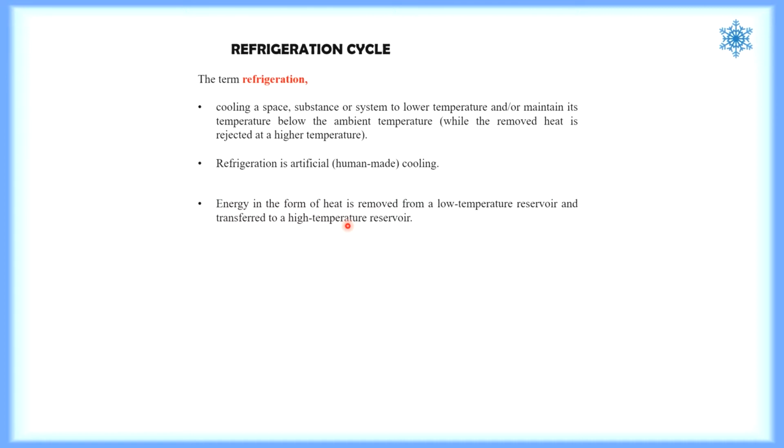Fourth point, work of energy transfer is traditionally driven by mechanical means, usually performed by a compressor, a refrigerant compressor. So refrigeration has many applications, including household refrigerators, industrial freezers, and air conditioning systems.

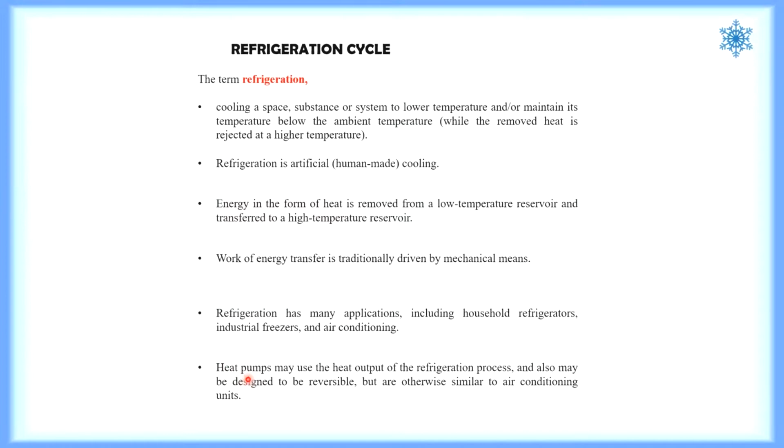Now, heat pumps may use the heat output of the refrigeration process, and may also be designed to be reversible, but are otherwise similar to air conditioning units. So we will be discussing heat pumps later on.

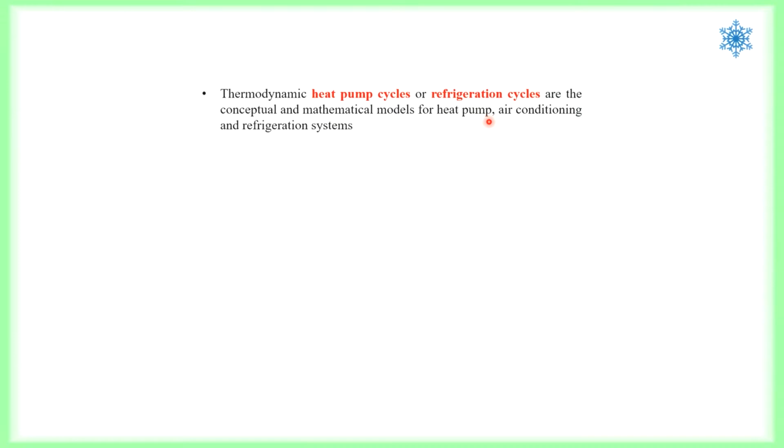Now, thermodynamic heat pump cycles or refrigeration cycles are the conceptual and mathematical models for heat pump, air conditioning, and refrigeration systems. A heat pump is a mechanical system that allows for the transmission of heat from one location, the source, at a lower temperature, to another location called the sink or heat sink, at a higher temperature. Thus, a heat pump may be thought of as a heater if the objective is to warm the surroundings, and is usually used in colder countries.

So heat is removed from a cold space or a cold place to a warm place—that is a refrigerator or cooler. A heat pump or heater is to heat up a space; a refrigerator or cooler is to cool down a space.

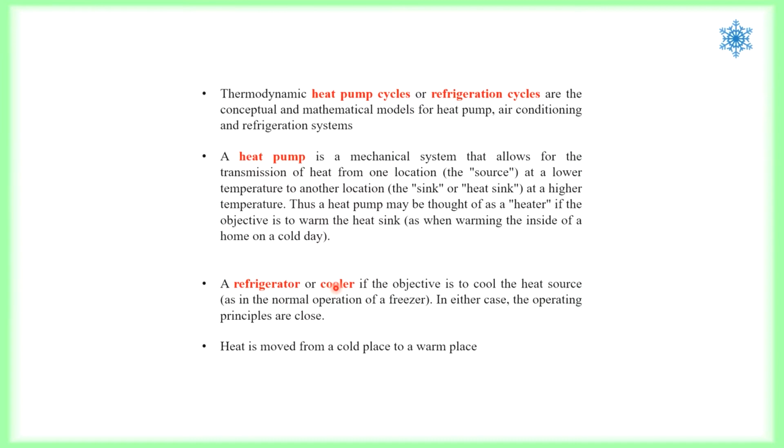So that's for the first part, the theoretical part of refrigeration. We'll continue with the principal parts of a refrigeration cycle. There are a few components within the refrigeration cycle which we have to take note of.

The principal parts are: the first one is an evaporator, which is a heat exchanger. Inside the evaporator, usually you have liquid refrigerant, or cooling agent, running inside tubes or coils. As it runs through the tubes or coils, it will tend to absorb heat from the surrounding air particles within the compartment, which are trapped or in contact with the tubes containing the refrigerant. Those are the substances which operate at lower temperature—we usually call them refrigerants.

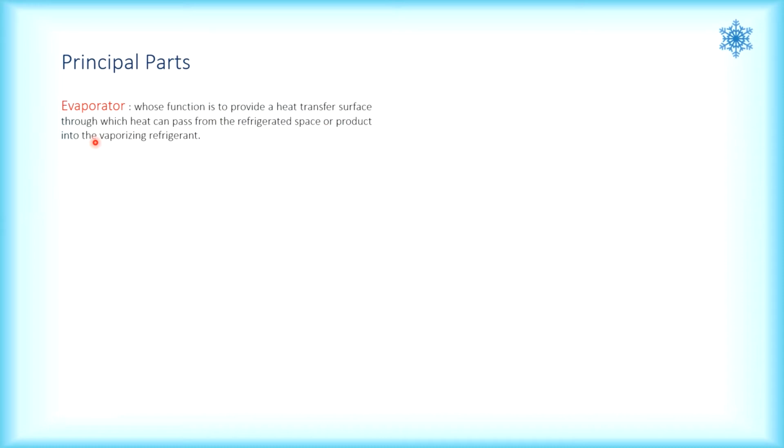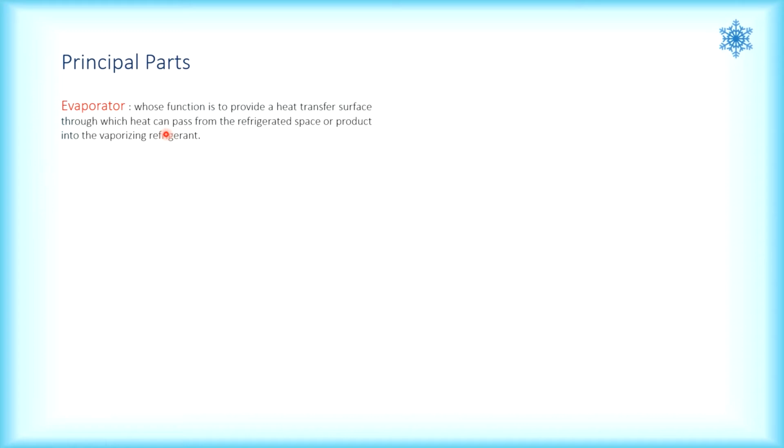Liquid refrigerant will be changing to vapor refrigerant as it absorbs heat continuously from its surroundings, through which heat can pass from the refrigerated space or product into the vaporizing refrigerant. So the refrigerant running inside the tube or coil will vaporize as it absorbs heat, because these refrigerants are very sensitive to heat energy. The moment even a slight amount of heat energy flows to it, it will start to vaporize in the evaporator, which is usually the freezing compartment of a household refrigerator.

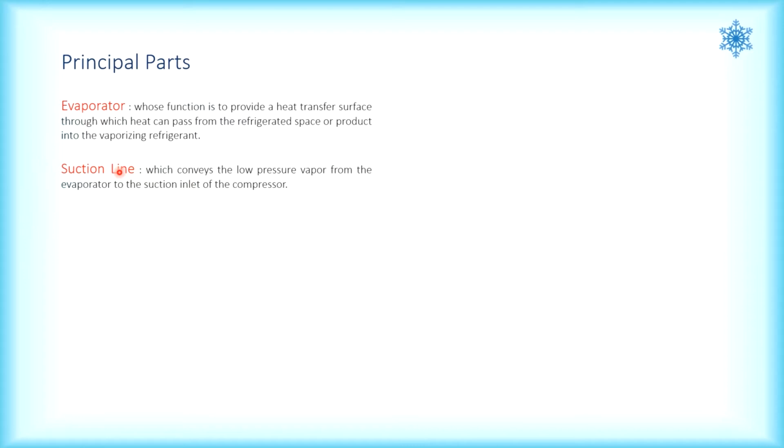Suction line, which conveys the low pressure vapor from the evaporator to the suction inlet of the compressor. So the suction line directs the vapor refrigerant to the compressor suction inlet. That is the purpose of the suction line.

Then the vapor compressor. Why do we call it a vapor compressor? Because this compressor only deals with vapor, not liquid. Compressors here cannot deal with a mixture of vapor and liquid because it will burn. So in case there is an overflow of liquid refrigerant into the compressor, it will cause the compressor to burn easily.

So it only deals with vapor refrigerant, whose function is to remove the vapor from the evaporator and then raise its temperature and pressure, to a point such that the vapor can be condensed with a normally available condensing medium. So this refrigerant, which is delivered to the compressor, will have its pressure and temperature raised, and then it will be sent to the condenser for the condensation process.

Now, the discharge line refers to the compressor. So the compressor has a suction line and a discharge line as well, which delivers the high pressure, high temperature vapor from the discharge of the compressor to the condenser.

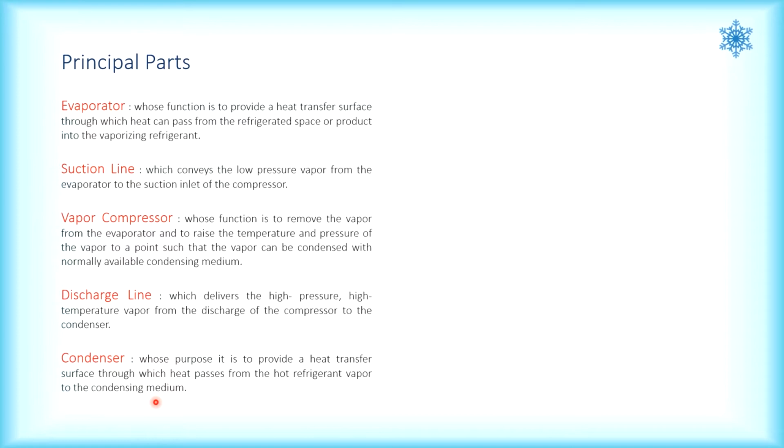The purpose is to provide a heat transfer surface, through which heat passes from the hot refrigerant vapor to the condensing medium. So if, for example, you are using a water-cooled condenser, the heat from the vapor refrigerant running inside the condensing tube will be rejected, or transferred to the water that comes into contact with the tube, by conduction and convection. So that is water cooled. You have air cooled, water cooled, and other means.

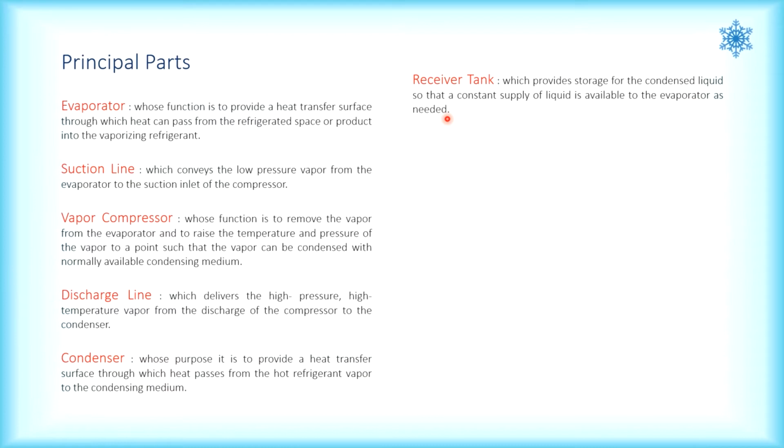Receiver tank, which provides storage for the condensed liquid, so that a constant supply of liquid is available to the evaporator as needed.

Then refrigerant flow control valves, regardless of type. The function of any refrigerant flow control is twofold, two functions. One is to meter the liquid refrigerant from the liquid line into the evaporator at a rate commensurate with the rate at which vaporization of liquid is occurring. So how much liquid refrigerant is being vaporized determines how much liquid refrigerant will be allowed to go into the evaporator. That is to meter the liquid refrigerant flowing into the evaporator.

Second point, to maintain a pressure differential between the high and low pressure sides of the system, in order to permit the refrigerant to vaporize under desired low pressure in the evaporator, while at the same time condensing at a high pressure in the condenser. So these are the two functions of a refrigerant flow control, usually what we call a thermal expansion valve, which is operated by means of temperature difference.

And then the last component is the refrigerant, that is the cooling agent. This is any body or substance that acts as a cooling agent by absorbing heat from another body or substance. To be suitable for use as a refrigerant in the vapor compression cycle, a fluid should possess certain chemical, physical, and thermodynamic properties that make it both safe and economical. These are the two most important points: it must be safe and it must be economical.

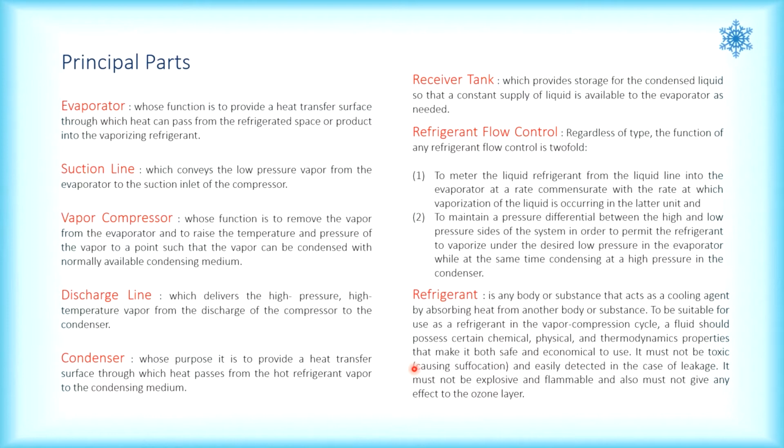Now we will move into the reverse Carnot cycle. Previously we had done the Carnot cycle, and this is called the reverse Carnot cycle. This is where initially the refrigeration cycle is being adapted. So starting from the reverse Carnot cycle.

In a reverse Carnot cycle, the heat flows in the direction of decreasing temperature. Usually, based on normal practice, heat flows from high temperature to low temperature. That is why it is said to flow in the direction of decreasing temperature - from high temperature regions to lower temperature regions.

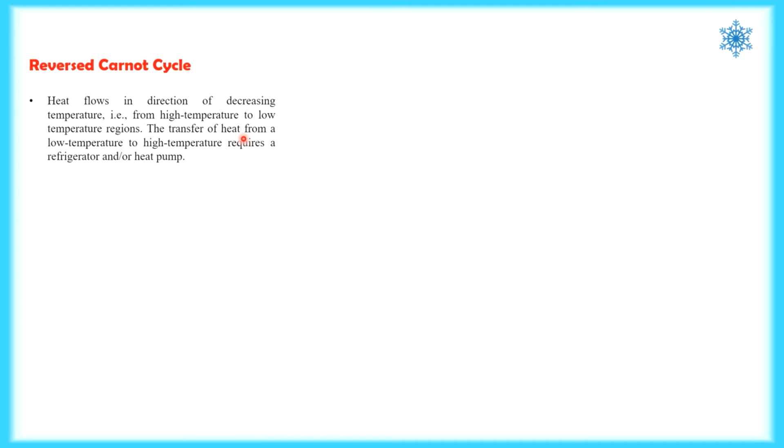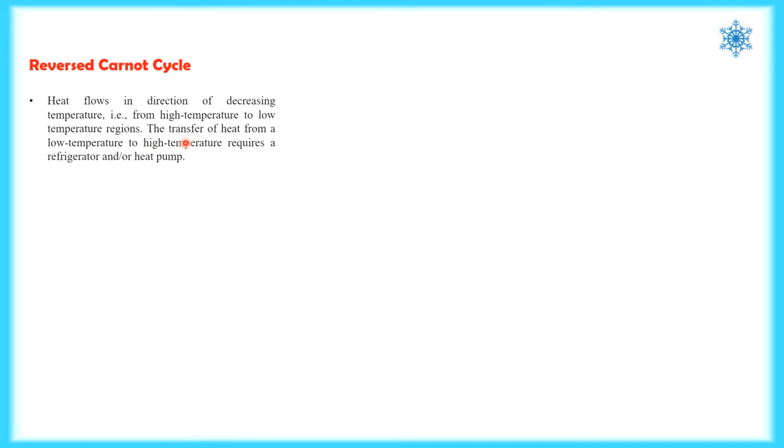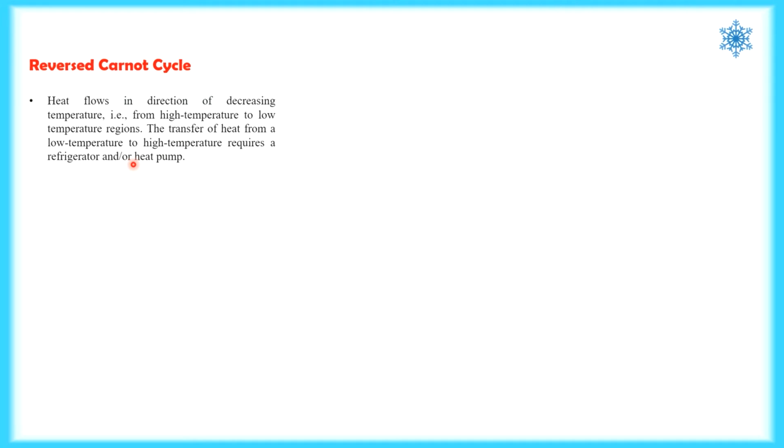Now the transfer of heat from a low temperature to a high temperature, the opposite direction, requires what we call a refrigerator or heat pump. In the refrigeration cycle, heat flows from the low temperature region to the higher temperature region. This is different from what we studied in heat engines, where heat flows from high temperature to lower temperature regions. So if we want heat to flow from a lower temperature region to a higher temperature region, we need something called a compressor.

A compressor will do the job of raising the pressure and circulating the refrigerant. So refrigerators and heat pumps are essentially the same device - they only differ in their objectives.

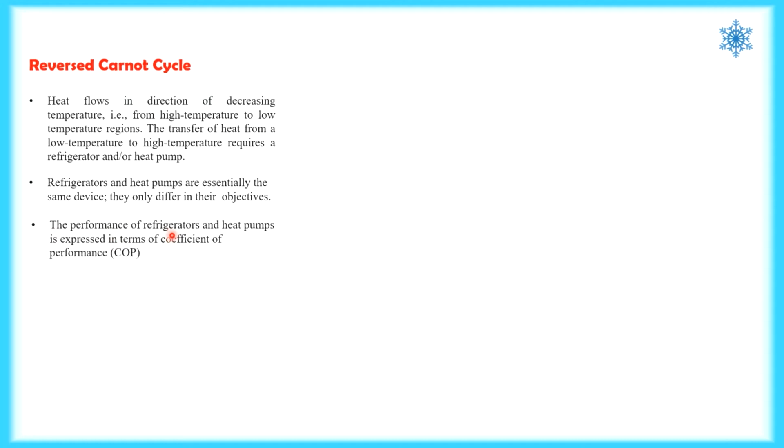So the performance of refrigerators and heat pumps is expressed in terms of coefficient of performance. We don't call it efficiency - we call it coefficient of performance, COP, instead of efficiency. The definition of COP is the same as the definition of efficiency: desired output over required input. So COP in short means the coefficient of performance.

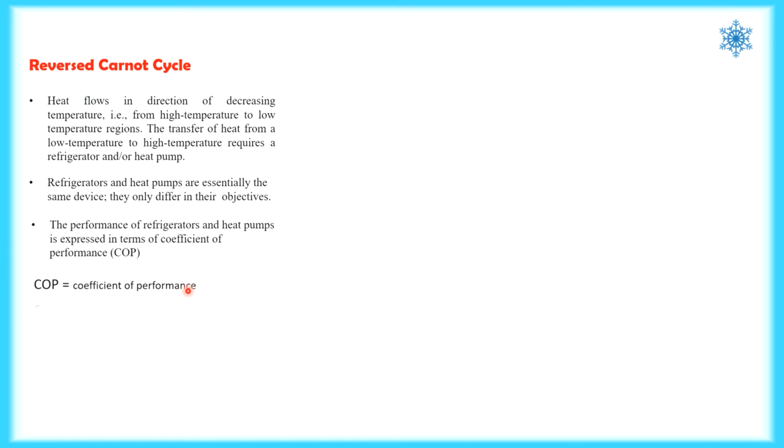We have coefficient of performance for heat pump. Remember, heat pump and refrigerator are actually the same device - it depends on the desired output. If the desired output is to heat up the environment or a space, then it requires a heat pump. If the desired output is to cool down the space or an area, that would be refrigeration. So you have COP for heat pump, and COPR stands for refrigerators - the coefficient of performance for refrigerator.

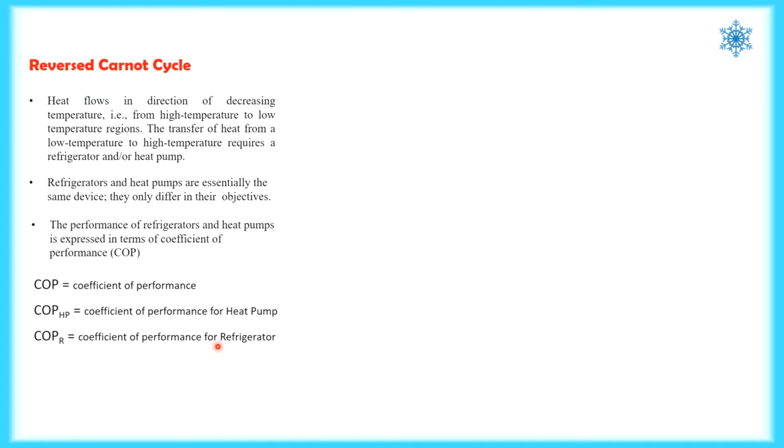So this is your reverse Carnot cycle. As you can see, heat flows from the refrigerated space, or the low temperature region, to the higher temperature region, that is the condenser. Here you have the evaporator, the refrigerated space, and here you have the condenser with surrounding air. So heat is being absorbed or taken by the refrigerant by means of circulating air - the air circulating within the compartment of the refrigerator, taking refrigerator as an example.

The heat circulated by the air will be picked up by the liquid refrigerant running inside the tubes of the evaporator. The evaporator is made up of plate, tubes, and coils. So you have heat absorption - during heat absorption, there is an increase in entropy and also a change in phase of the substance from liquid to vapor. Heat absorption is usually called the refrigerating effect or the cooling effect.

So in order to transfer the heat from this low temperature region to this high temperature region, it requires this energy here, which we call the work input. Usually this is performed by the compressor, the refrigerant compressor. So the refrigerant compressor's purpose is to circulate the refrigerant and also to raise the pressure and temperature of the refrigerant so that it will be able to be rejected to the surrounding air in the condenser.

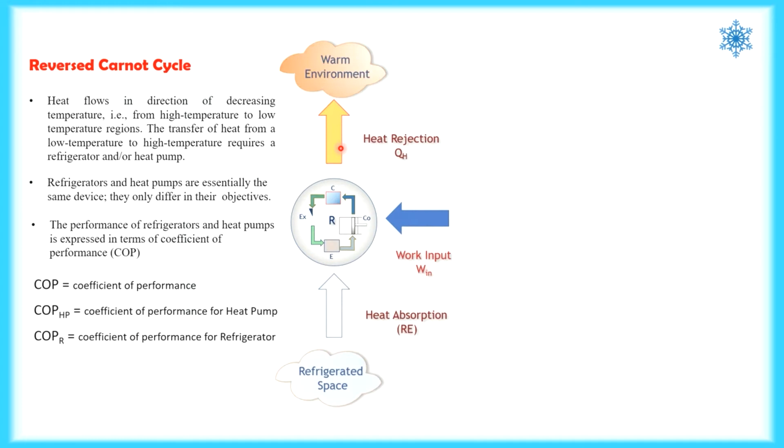Okay, so that is work input, and this is heat absorption, and this would be your heat rejected. So you have energy input from these two streams. One is work in, and the other one is heat absorbed. So going in, and this as the energy that is going out, which is the heat rejection. So by energy balance, you can say this plus this, both are in, and this is out. So this plus this must be equal to this, okay, according to the energy balance.

So this would be a TS diagram for a reverse Carnot cycle. It looks almost similar to what we have for vapor Carnot cycle, that is a steam power plant, okay, and the only difference is this is in anti-clockwise direction, and the previous heat engine is in clockwise direction. So you can see, everything is working in the reverse direction from low temperature to high temperature. Heat engines go from high temperature region to low temperature region.

So as you can see, it consists also of two isothermal processes and two isentropic processes. The higher pressure line is called the condenser pressure, and the lower pressure line is called the evaporator pressure. So remember, when you look into this diagram, point 2 is dry saturated, point 3 is saturated liquid, and we have wet vapor refrigerant. So 1 to 2 and 3 to 4 is reversible isentropic, 2 to 3 and 4 to 1 are reversible constant pressure and isothermal. So 1 to 2 is isentropic compression, 3 to 4 is isentropic expansion, 4 to 1 is constant pressure heat absorption or refrigerating effect, and 2 to 3 is constant pressure or isothermal heat rejection.

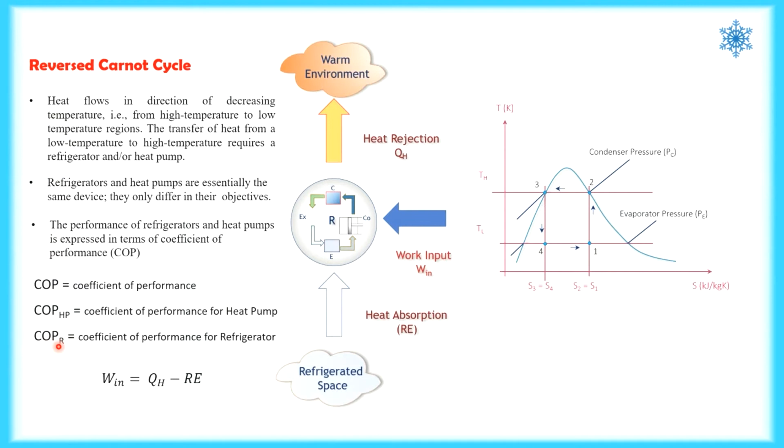So we know that the area of the TS diagram is the heat flow or the heat energy flow. Okay, so here you can see in the first TS diagram, 2 to 3, this is a decrease in entropy. So the system will undergo, or heat will be transferred out from the system. Our system here is the refrigerant, is the cooling agent. So heat is rejected to the surrounding when it flows from state point 2 to 3, where it undergoes constant temperature or constant pressure heat rejection. And you can see that the entropy is decreasing. That means it shows that the heat energy content within the system is being transferred out from the system.

Then the next TS diagram here, you can see state point 4 to 1, and this area again represents heat flow. So 4 to 1 shows you an increase in entropy. That means there is heat flowing into the system or to the refrigerant. So that is considered as the heat absorption, the heat that is being absorbed by the food, by the substance or whatsoever you put inside the refrigerator, which contains a certain amount of heat. So the heat will be transferred to the refrigerant that is running inside the evaporator tube. That is why you can see the entropy increases, and that is represented by this area here.

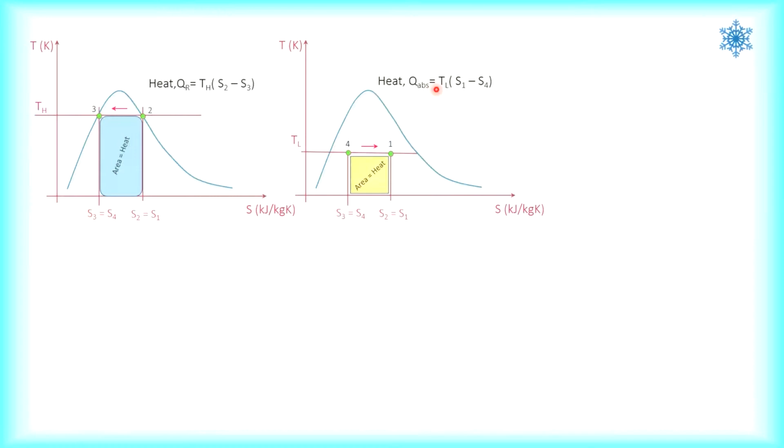So RE is the short form for refrigerating effect or the cooling effect, and you can use RE instead of Q absorb. RE, or the refrigerating effect, is usually equivalent to the area that is within or below the process path of 4:1 of a TS diagram.

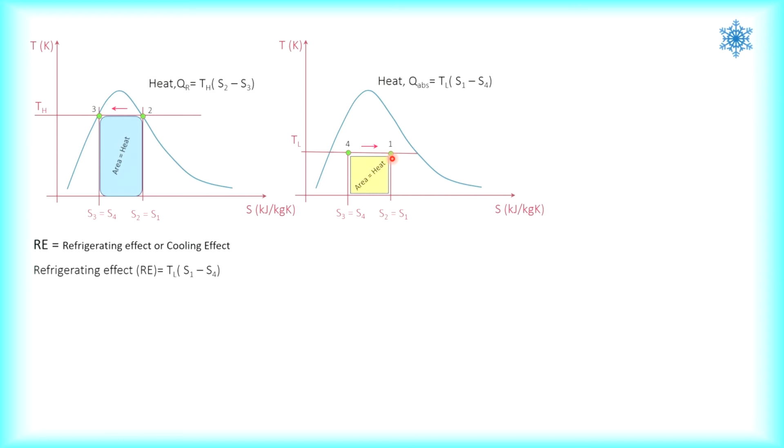Don't confuse with this. The refrigerating effect shows at the lower part of the TS diagram, and it also shows the increase in entropy because the refrigerant is actually taking in heat energy from the surrounding. That is why the entropy increases. Also, because it is changing from liquid to vapor, heat is being absorbed by the liquid refrigerant in order to change to vapor refrigerant.

So COP is also defined as desired output over required input. As I have said, efficiency and COP definition are the same. Efficiency usually measures something that is below 100% or equal to 100%, or 1, whereas COP is when you have something higher than 100%, or higher than 1. That is why we don't use the term efficiency for refrigeration cycles; we use a term we call coefficient of performance, defined as desired output over required input.

So it depends on the refrigeration cycle. You are looking at the heater part, that means the heat pump part, or the cooling part, that is the refrigerator part. If you are looking at the heater or heat pump part, then you will have COP/HP. So the desired output will be the heat rejected to the surrounding. You are rejecting heat to the surrounding, so the desired output would be this for heat pump. The required input is the same, that is work input.

If you are referring to the refrigerator, the desired output would be this, that is 4:1. So the desired output here is to cool down the surroundings. This one is to heat up the surroundings, because here they are rejecting heat to the surroundings, and here they absorb heat from the surroundings. So this part is for cooling and this part is for heating. COP/HP refers to this as desired output, and COPR refers to this as its desired output.

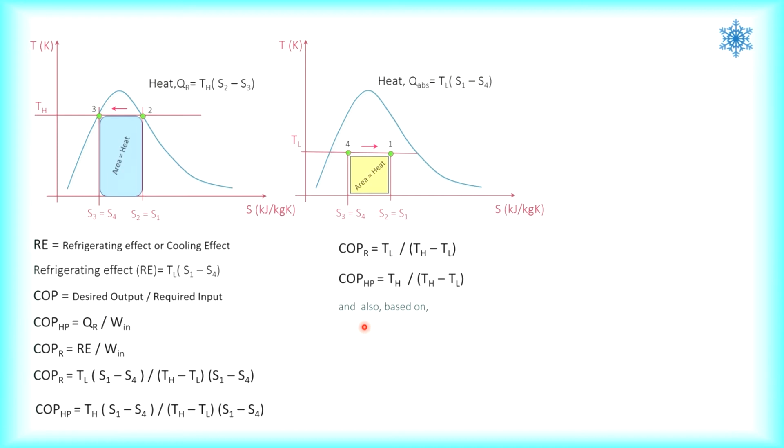And also based on this, we know that in plus in equals to out. So in plus in, that is work in plus RE, that is the heat absorption or refrigerating effect, will be equal to this. Based on this energy balance, if I divide this equation throughout by work in, you will have QR over work in, which is the COP HP, and work in over work in equals 1. And this RE over work in would be equal to the COPR. So it comes to this equation here, where COPHP minus COPR is actually equal to 1.

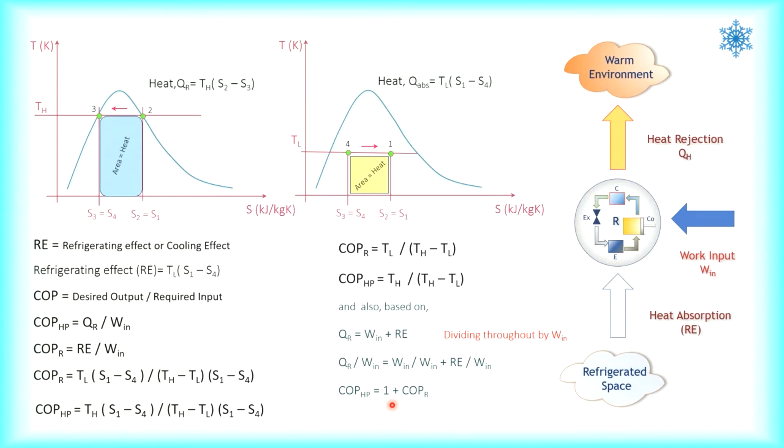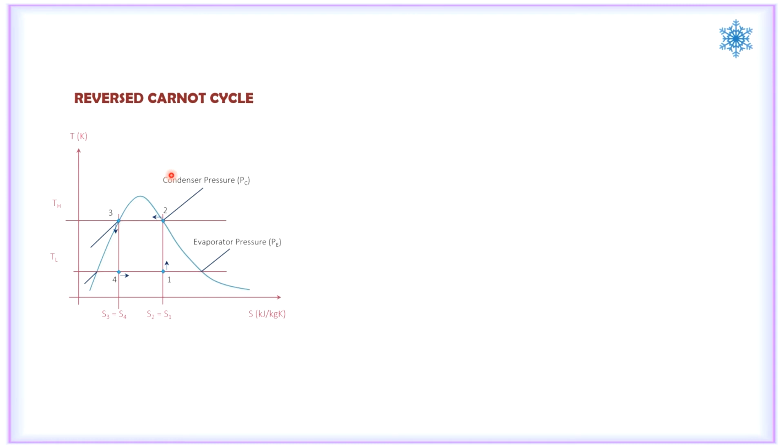For the reverse Carnot cycle, there are a few limitations for it to perform as an actual refrigeration cycle. So they use a turbine for the isentropic expansion, which is not practical because a turbine requires a very large floor surface, which makes it impossible as a household refrigerator.

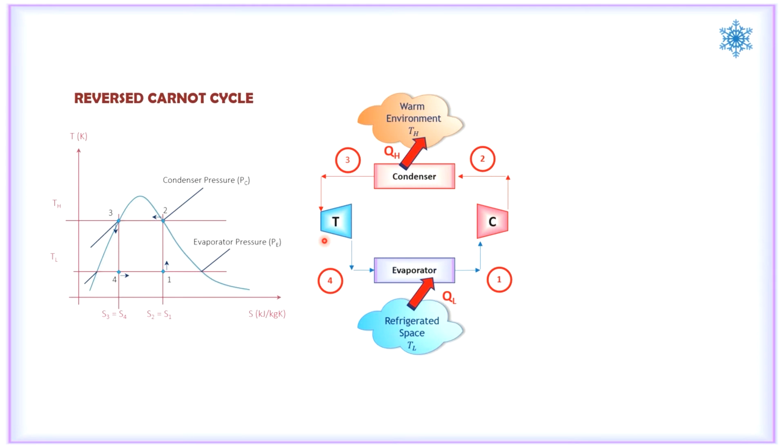Second thing is it is very costly, meaning very expensive — very costly and uneconomical. So it is advised not to have a turbine for the case of any household appliances or household use. I have listed down two points here: one is the process 1 to 2. Now this point 1 here, you can see that is the inlet to the compressor.

That is the inlet to the compressor. As I've said, the compressor can only deal with single phase, no two phase. Here, point 1, which is inside the dome, means it is a saturated liquid and vapor mixture, also called wet vapor, which makes it impossible for the compressor to function under such a condition. So process 1 to 2, the compressor cannot deal with a two-phase substance, which involves the compression of liquid-vapor mixture. That is the first limitation.

The second one is process 3 to 4 here, expansion of high moisture content in a turbine. It requires large floor area because from 3 to 4 here, they are using a turbine, which makes it unaffordable for domestic purposes. So therefore, this part 3 to 4, and in the later section on modification of the reverse Carnot cycle, the turbine will be replaced with something more economical, or cheaper, which is called the expansion valve, the thermal expansion valve or throttling valve.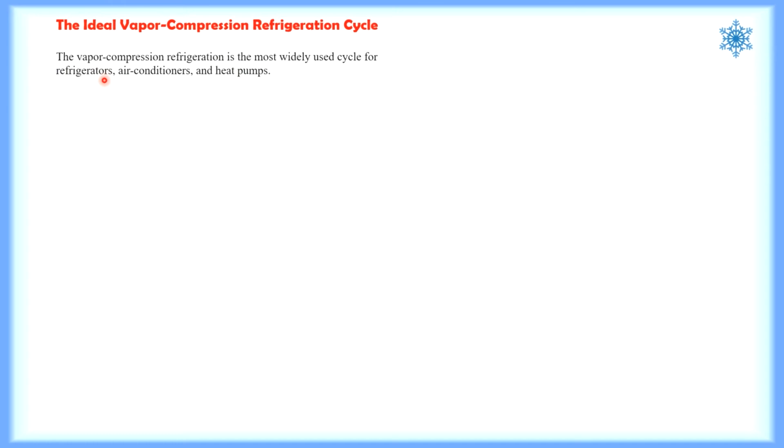Now, the ideal vapor compression refrigeration cycle. The vapor compression refrigeration is the most widely used cycle for refrigerators, air conditioners, and heat pumps. I hope you all know the difference between refrigerators and heat pumps by now. So this would be the schematic diagram for the ideal vapor compression refrigeration cycle.

So instead of a turbine, we still have these components: the evaporator, the compressor, the condenser. But we replace the turbine, which is in the reverse Carnot cycle, with an expansion valve. During the expansion process, what happens is the liquid refrigerant, or the mixture of liquid and vapor refrigerant, will undergo a throttling process, an irreversible throttling process, which gives equal enthalpy. So H3 equals H4 for this part.

And this should be a direct valve. I have drawn the wrong symbol. You should only have the top triangle, not the bottom triangle. This is a directional valve, meaning it only allows flow from one direction, not reverse. Only the upper triangle, flowing from the condenser to maybe the receiver, or to the evaporator. Here they don't show you the receiver. So during this process, the enthalpy is constant.

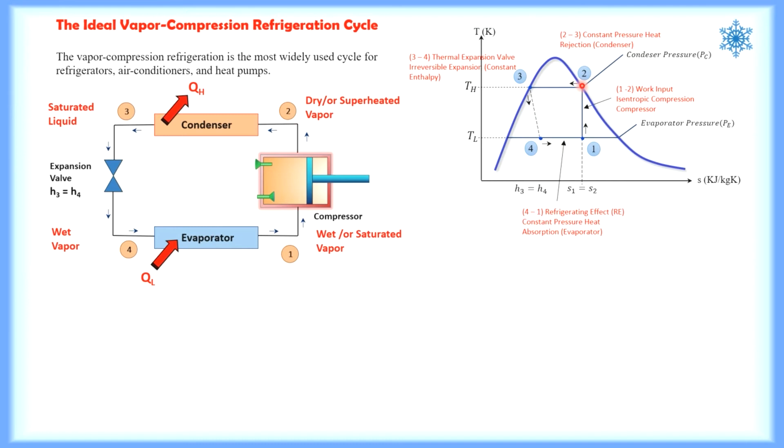You can have two different TS diagrams. One is based on dry saturated at point 2, and the other one is based on superheated at state point 2. That means at state point 2, there are two possibilities: either it is dry saturated or it is superheated. So I have both TS diagrams drawn here to show you the difference.

So in the first diagram, as you can see, state point 1 to 2 is isentropic compression. The compressor, the device used to perform this job, is a refrigerant compressor. And that is where you have your work input.

Then from state point 2 to 3, this has to be under a constant pressure process. That is reversible constant pressure heat rejection in the condenser. During this, there will be a change in phase taking place. You can see here the temperature still remains constant and pressure also constant. So during this constant temperature, heat is continuously rejected to the environment or the surroundings.

Okay, when it changes, it changes from vapor back to liquid. That is in the condenser.

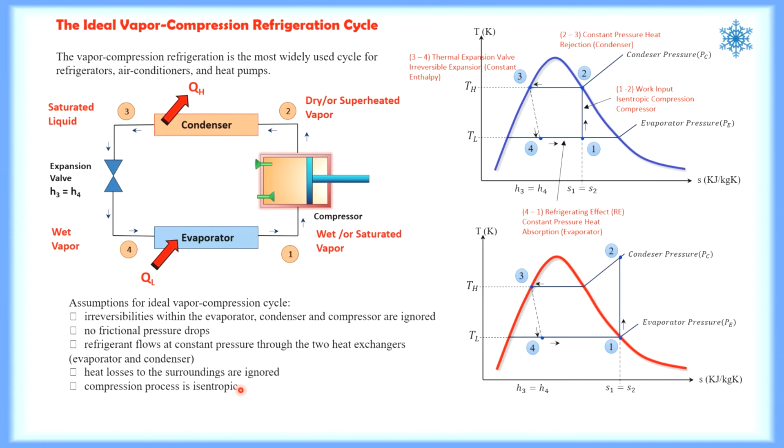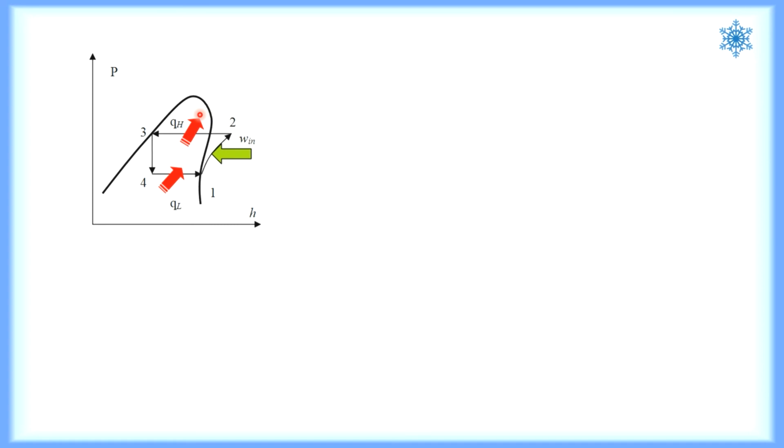So you have heat transfer into the system and heat transfer out of the system, which is the refrigerant, the cooling agent. And this would be your TS diagram, which we have been seeing just now.

Okay, so here I think you know each of these processes already by now. 1 to 2 is a reversible adiabatic or isentropic compression of refrigerant. The saturated vapor at state point 1 causes state point 2 to be superheated. So the work input by the compressor should be H2 minus H1.

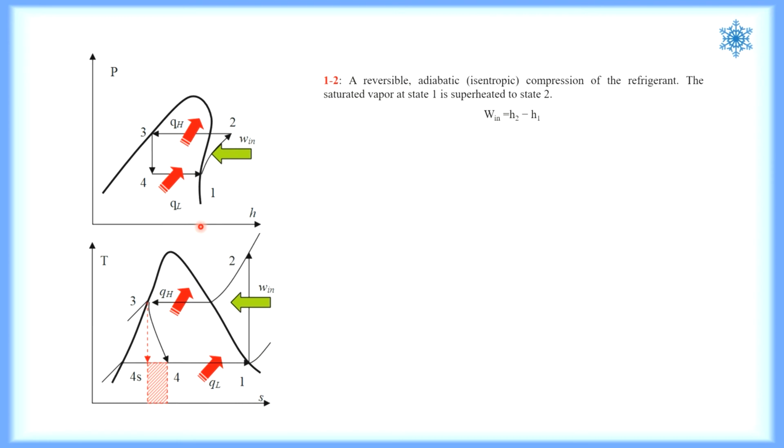So your H is here, H2, and your H1 is here, in case you are looking at a p-H diagram. Then state point 2 to 3, that is from here to here. So to find the amount of heat rejected, you take H2 minus H3.

Then from 3 to 4, which is an irreversible expansion process, remember the enthalpy should be constant, that means the same. Then 4 to 1, when your desired output is to cool the surroundings, you take this. If you were to heat up the surroundings, then you take this as your desired output.

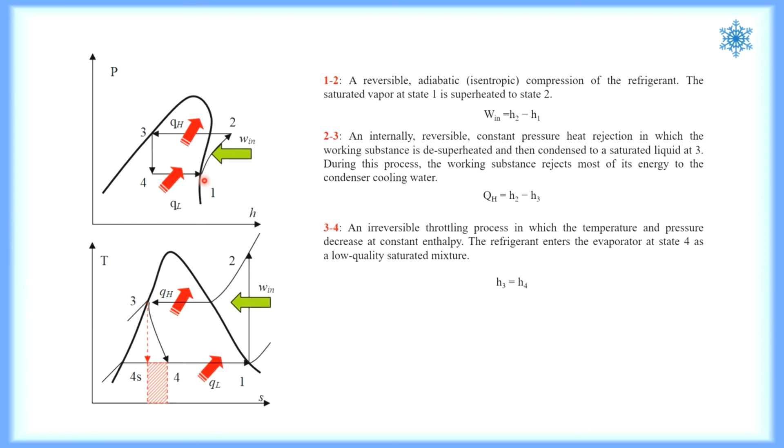So from 4 to 1 is where you have your evaporator, or the freezing compartment, and the heat absorption or the refrigerating effect is usually taking the H1 here minus the H4 here.

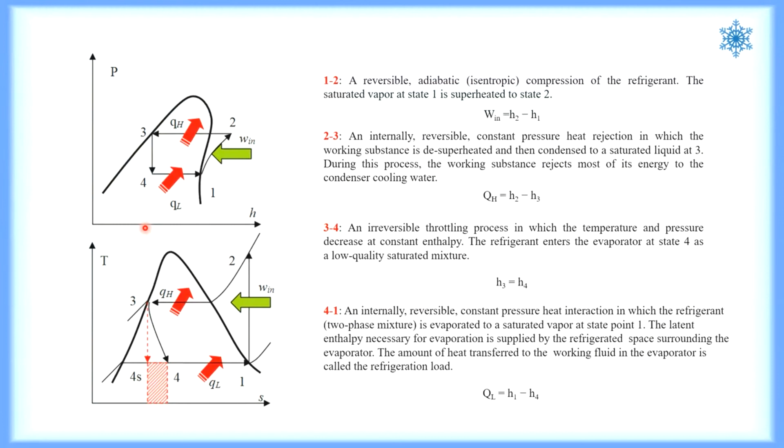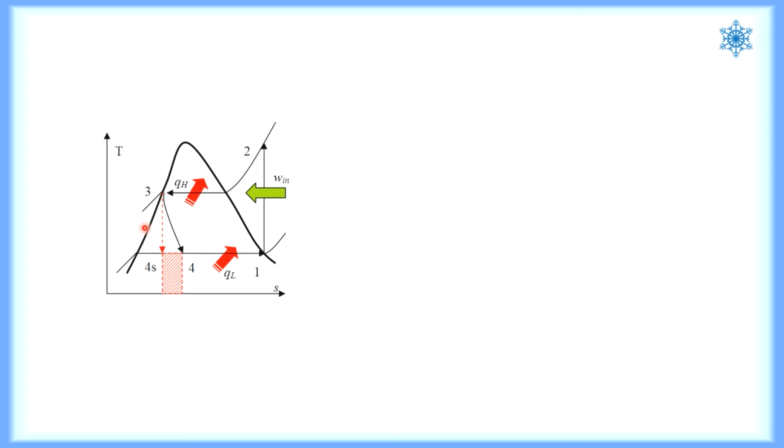Okay, there's too much 'okay' in my explanation. I'm very sorry for this because I have got too used to it. If I stop saying okay, then my explanation will not be that smooth, because maybe this has been my bad habit.

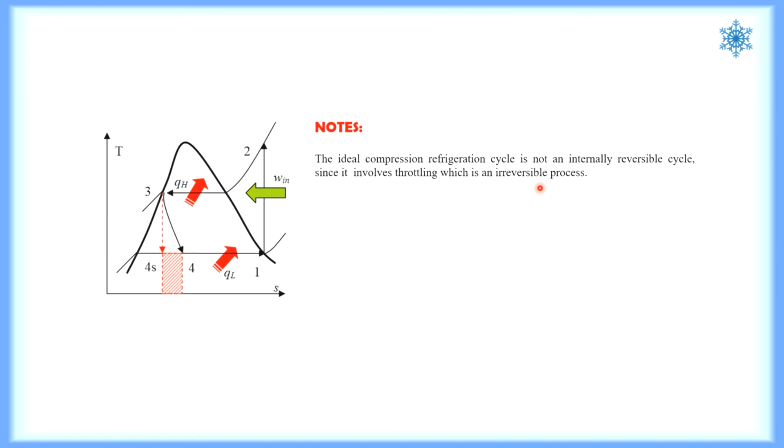Take note of this here. The ideal compression refrigeration cycle is not an internally reversible cycle, because this whole thing, involving a throttling process, is irreversible. So that is why it is not completely reversible.

Now, if the expansion valve or the throttling device were replaced by an isentropic turbine, the refrigerant would enter the evaporator at state point 4S, instead of state point 4 as I explained just now.

However, replacing the expansion valve by a turbine is not practical due to the added cost and the complexity. So this is the important notes on why we don't use the reverse Carnot cycle as a model for actual refrigeration cycle. We only use the ideal vapor compression refrigeration cycle as a model.

The COP improves by 2 to 4% for each degree Celsius the evaporating temperature is raised, or the condensing temperature is lowered, if you replace by a turbine.

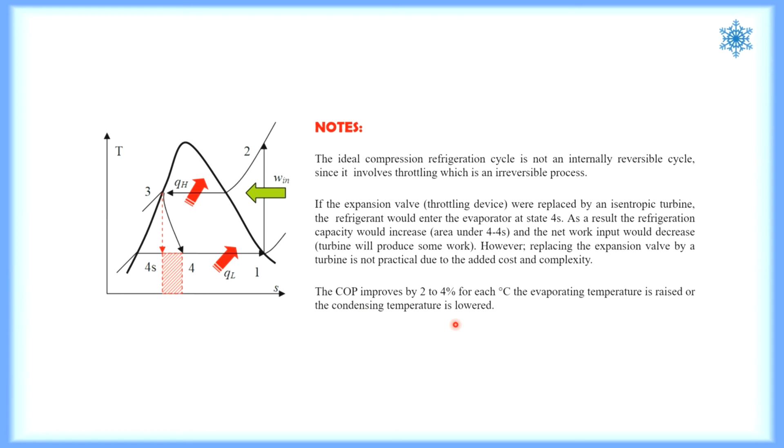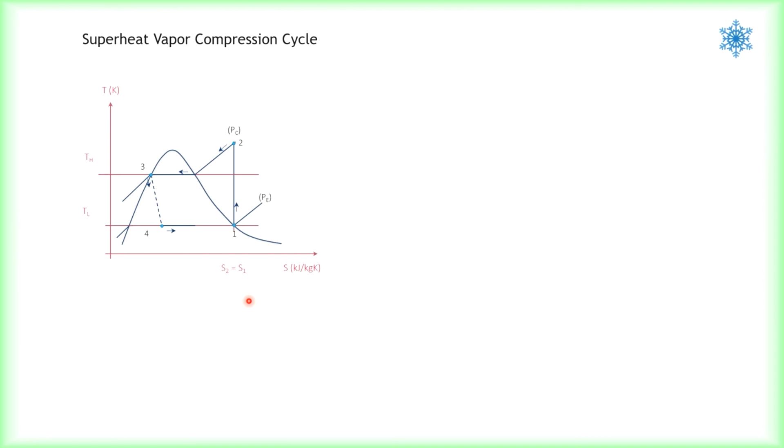So now, the superheat compression cycle, vapor compression, as what I have shown you just now. You can see here, that is your work in, heat reject, RE, refrigerating effect.

The reason is also the same, to improve the COP, or sorry, to improve the RE, the refrigerating effect. So sometimes it is being undercooled.

And then for the expansion process, the irreversible expansion process, which is 3A to 4, we only equate H3A to H4, not H3 to H4. Please take note when it is undercooled or subcooled, H3A equals H4, and not H3 equals H4.